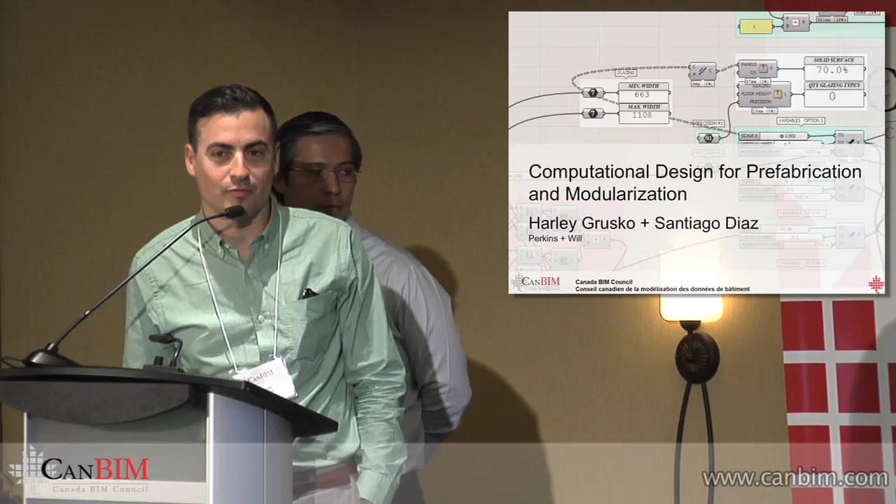But regardless, Santi and I are going to present, as you see here, computational design for prefabrication and modularization. One of the things that was mentioned just prior to us coming up here was that we were going to speak about Van Dusen, and I promise Van Dusen is a significant part of this presentation, but we also have another project called Orchard Commons that we're working on right now, which we'd love to show you as well.

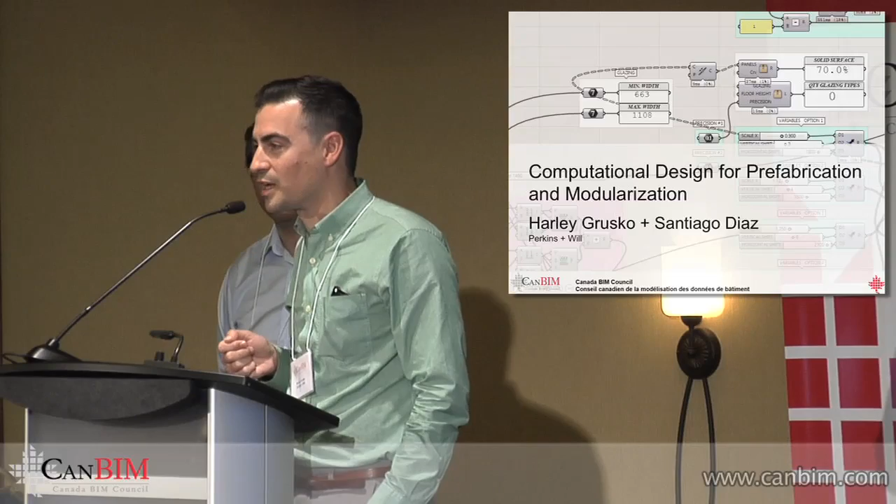So just a little bit about us. I'll introduce myself, and then Santi can take over and introduce himself. Santi and I have worked together for some time now at Perkins & Will, and we both had an opportunity to work on the Van Dusen project together. But just so you get some of the highlights here, I came originally from Winnipeg. I graduated at the University of Manitoba in 2007, and had an opportunity to come out to Vancouver to work with Perkins & Will, and I jumped at that chance, and it's been excellent thus far. I was the project architect on the Van Dusen Gardens project. Santi?

So I'm Santiago. I'm the senior computational designer at Perkins & Will Vancouver. I started in manufacturing just over 10 years ago. I worked at StructureCraft Builders, which is also a local firm, for about 6.5 years, and then I joined Perkins & Will almost 2 years ago.

So I can see that the font is not the same. Anyway, that's okay. This is a common problem.

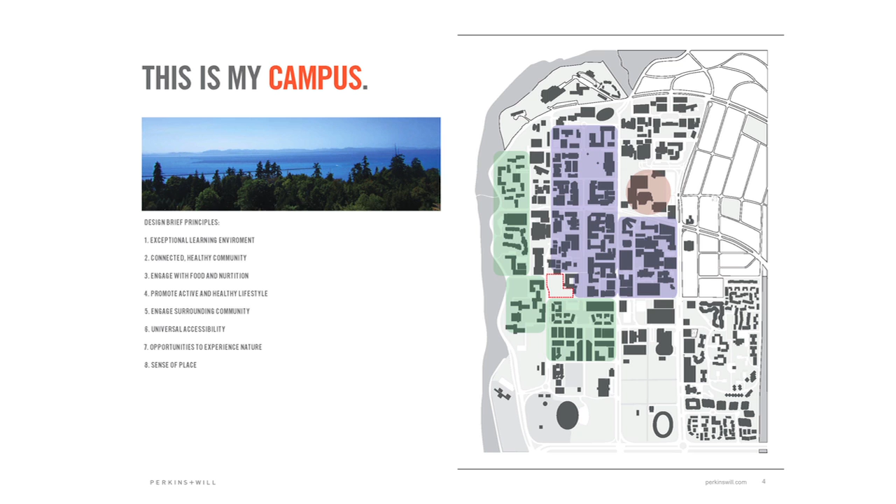They want to engage the surrounding community, so the building should feel at home within the context. Universal accessibility, of course, is a major factor. You're going to have people from all over the world coming to this hub, so you have to make it as accessible as possible. And opportunities to connect with nature. Nature is a very important part of what UBC stands for, and also create a sense of place. So as they're marketing this to the international crowd, they really wanted it to be something that was identifiable, even architecturally.

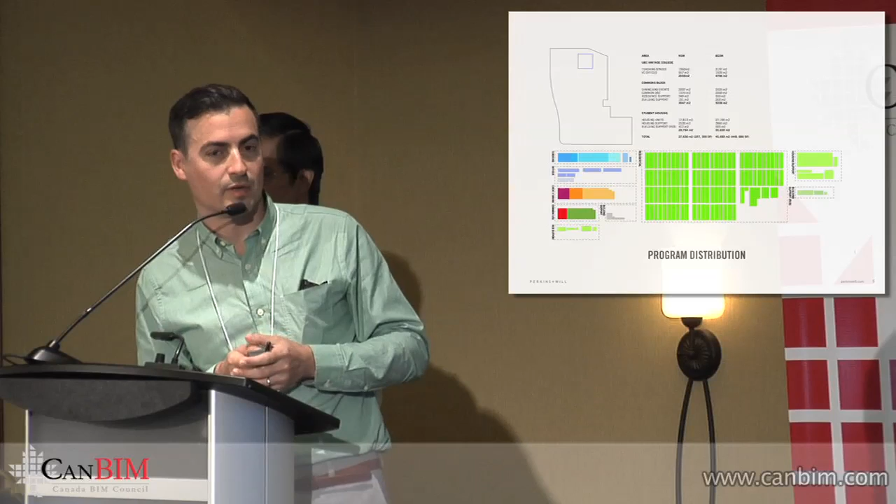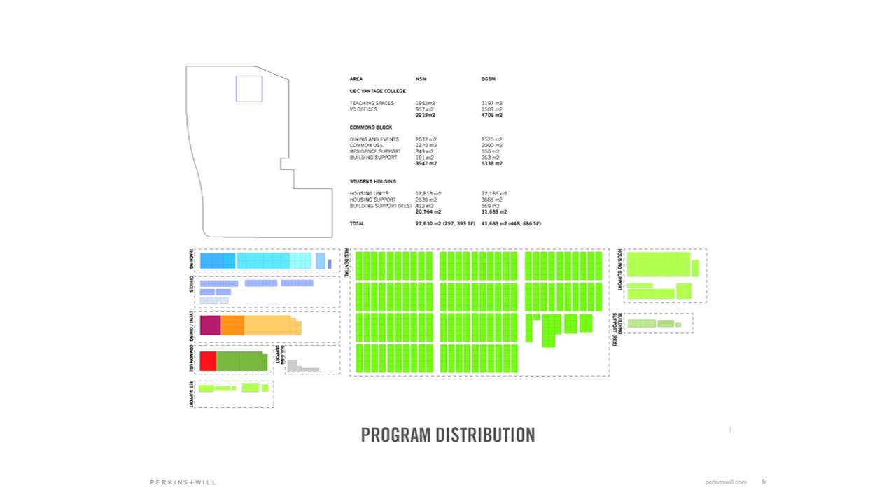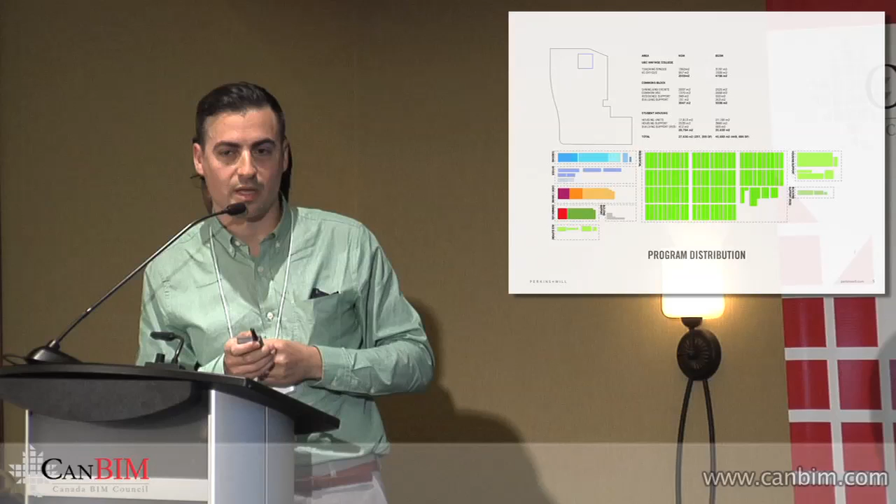Just the basic program. I'm not going to go into the nitty-gritty of this. You probably can't really see it very well. But essentially, there are 3 major components of the project. There's the Vantage College, which is actually the academic wing, the Commons block, which is where the dining and events are held, all the commons facilities for the student housing, and then the student housing itself, which really makes up the bulk of the program. That's all the little green bits there. Those are representative of actually all the rooms. There are about 1,050 student residences. And I think the whole thing is about 40,000 square meters in area.

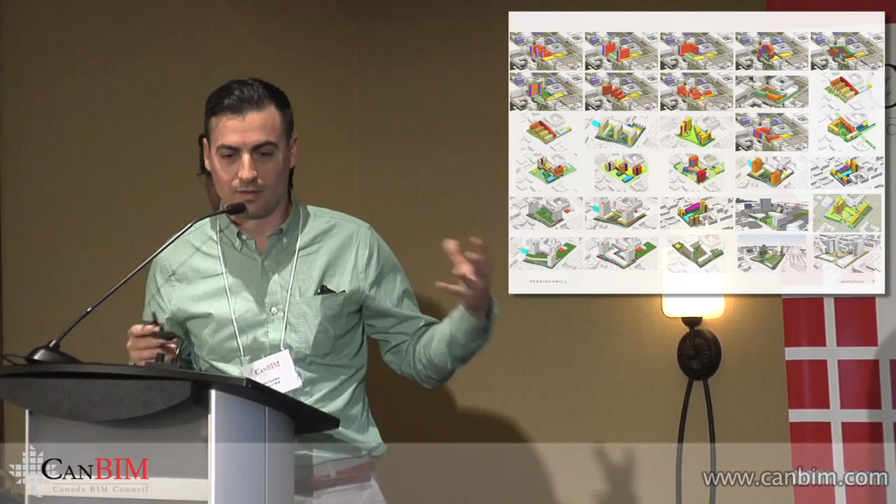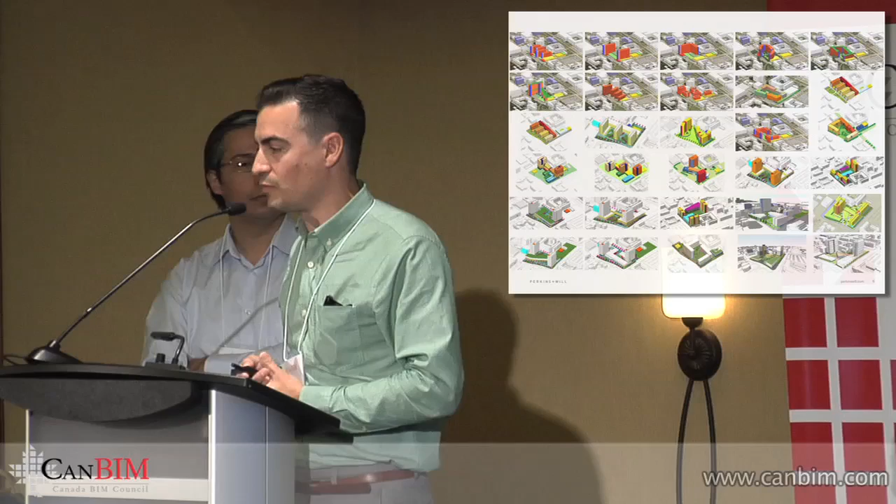So I love leading with things like this because the architectural concept was a series of explorations, let's put it that way. We spent a lot of time, and in fact, this is really probably 50 different types of program massings that we had come up with to look into the different ways in which people can occupy this site. So we looked at 3-tower schemes, we looked at 2-tower schemes, we looked at perimeter block, courtyard type designs, a whole bunch of different things, really to find a way to create a unique living environment for the residents at an urban scale.

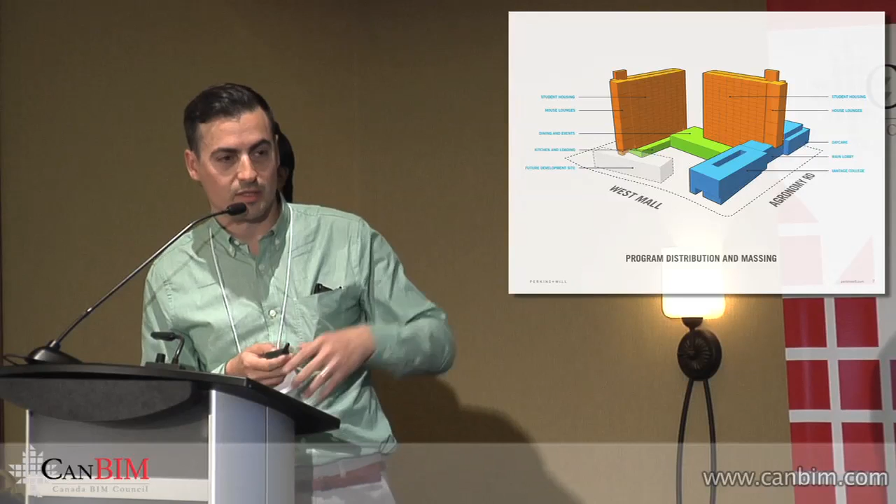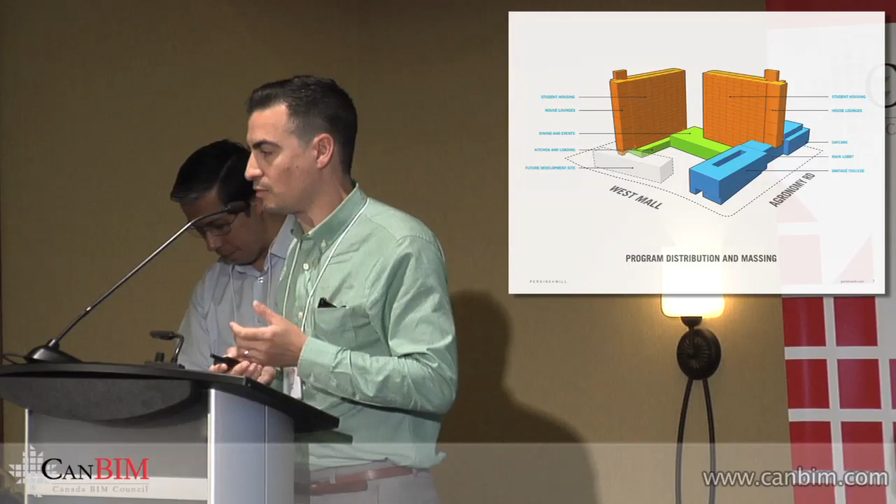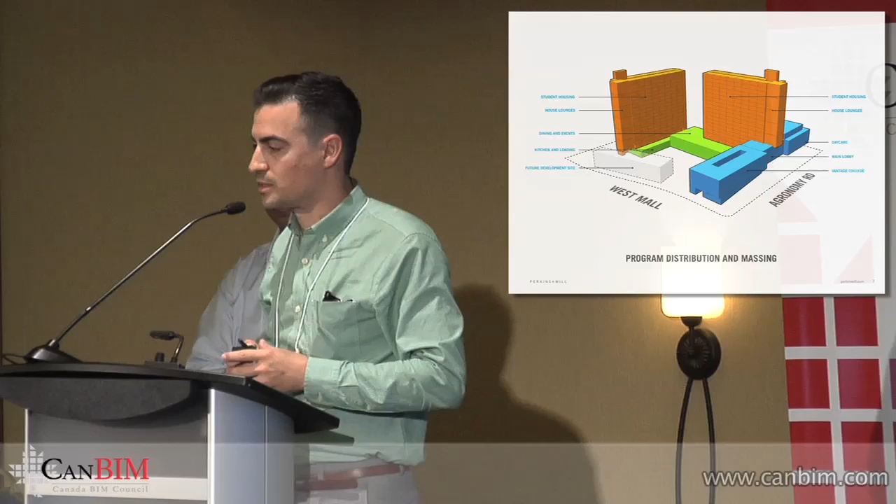But what we ended up with was basically a 2-tower scheme, and you can see the basic partie in this diagram here. So we have essentially 2 towers for the residences with these cascading student lounges that rise vertically on the edges of the building. We've got a long academic block that runs along Agronomy Road, and then all the shared programming for the student housing is that green mass that you see there connecting the 2 towers.

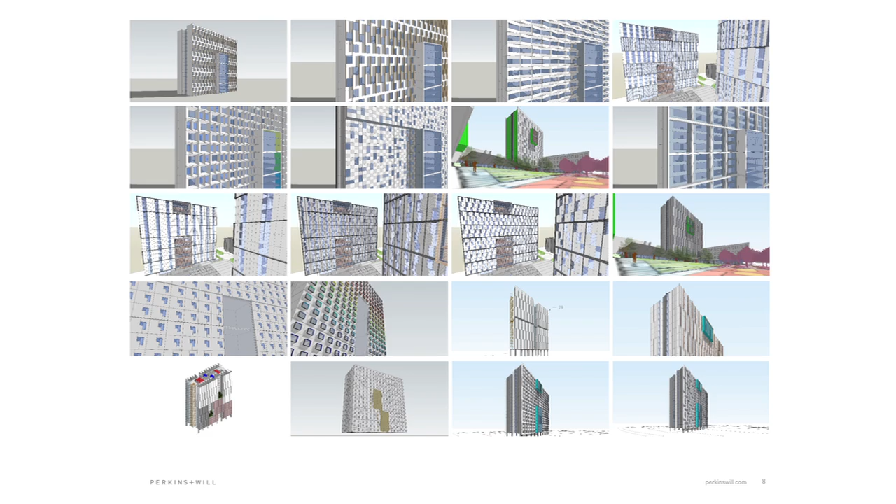So after doing all this formal exploration of the massing, we ended up with something quite conventional in some ways. So we struggled to find a way to create uniqueness given the massing that we ended up with. So we began to look at skin, and we started to explore different ways that we can create a new kind of aesthetic, if you will, based on the parameters that we could play with, which was really the skin of the towers.

And we were looking at precast concrete, actually, because the client, UBC Properties Trust, had experience in using it in a previous project and thought that we could apply it on this project and do it in a unique way. So we looked at a lot of different ways in which we could do it, a lot of random patterns, staggered patterns, all sorts of different arrangements, punched holes. We really thought, you know what, it's just not unique enough.

So we went back to the basics and thought a little bit more conceptually, and I'm going to get a bit architectural here, I can't help it. But we were really thinking about cultural identities. So you've got people coming from all over the world to Vancouver, and what is unique about those different cultures? Could we create a sort of diversity in the way in which we create the aesthetic of the building? And that has to do with the international nature of the building.

And what about nature? As I mentioned before, that's one of the original themes. What can we learn from forms that you find in nature? So we were looking at some of the ripples in water and things like that. And we also had this idea that the social spaces that connected the building would be done in wood. So this is a major part of the concept that we were working with in the project. And what can we learn from wood? So we started looking at some of the patterning that you might find in wood.

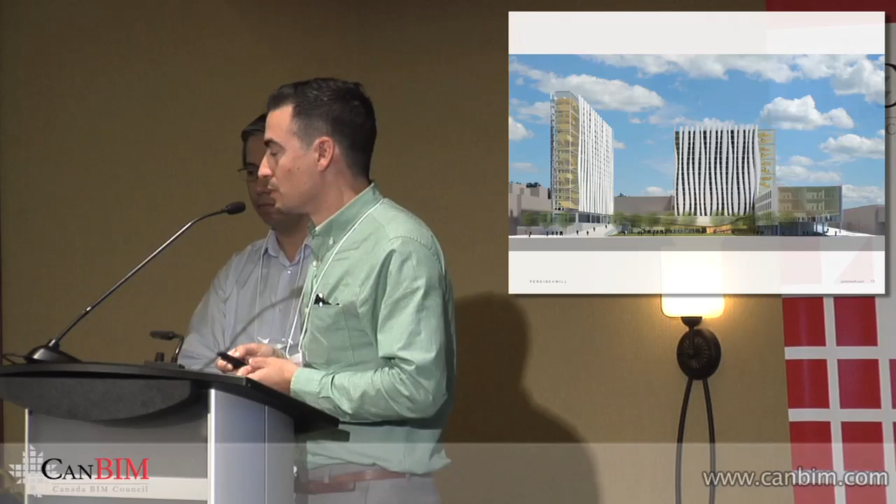So this is where we went, and this was sort of, I guess, the 21st century of a napkin sketch, maybe. I drew this almost a year ago or so, and like I said, when I drew it, there was no real kind of computation to this model, and you'll see basically the next steps as to how we start to add computational design to this basic overall form.

And really to do that, we had to identify what were the essential components that we're trying to get to here. So we had a high thermal performance as one of the main objectives. And really what this meant was a 60-40 split. So 60% of the building was to be solid and 40% of the building was to be glass. And this comes out of the thermal performance objectives.

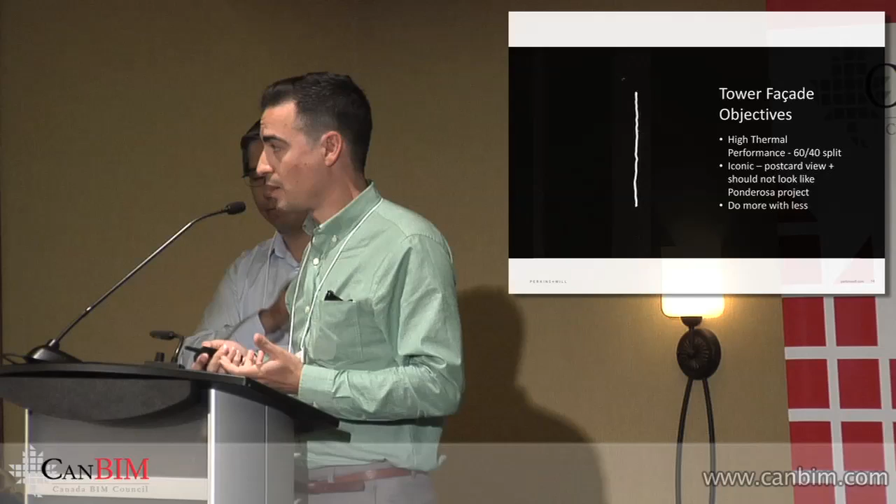And this is actually a bit rare in Vancouver, it's a lot more solid wall than you would typically have in towers around Vancouver. And again, an iconic postcard view, but not to look like the project that they had done before, which is the Ponderosa. Unfortunately, I don't have any photographs of that project. And then, of course, what all architects want to do, I think, is do more with less. Create the biggest impact with the least amount of moves that you can.

So we started with the basic straight line. And we wanted to exploit this fluidity of concrete. So we took that line and started to think about a single line with opposing forces. So different cultures are coming together and reacting against this line, creating this sort of curved spline. And we started to realize that you can create the shapes I was originally drawing by producing a calligraphic effect. It's really taking that singular line, creating it again and shifting them vertically. And we thought this is a way to create diversity without adding any more complexity.

And as I mentioned before, we were given this task of using precast insulated panels. So how do we start to think about modularization, prefabrication? How does that affect the way in which we create these ribbons? Well, we realized that the ribbons are two parallel lines that are shifted vertically. So what I'm getting at here is that there's a process of reduction in a way, because the original image that I drew in Rhino and had a little fun with, I think that's what I wanted to do, but it actually took a few steps through computational design to determine the essence of the design moves that we were creating.

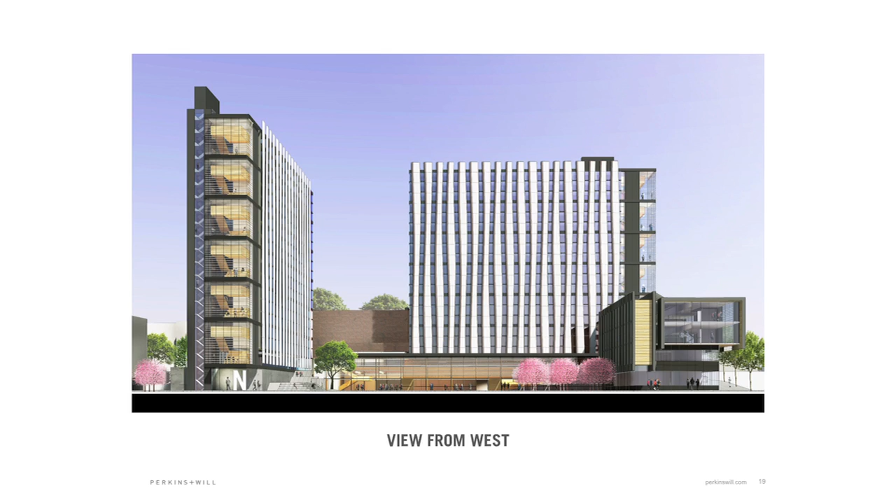So this is where we got to after that first exploration, and you'll see that it certainly looks a lot more subtle, I would say, than it did originally. But really, it's actually capturing, in my mind, the essence of what we were trying to create.

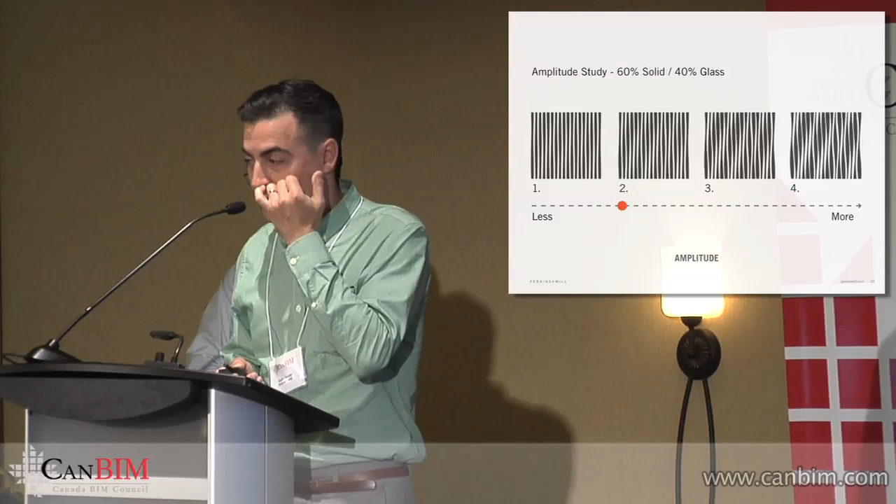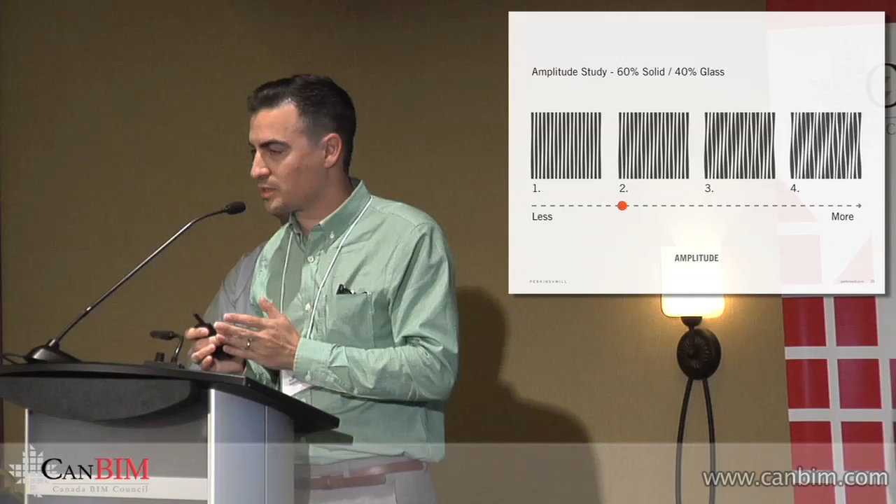And I think one of the other fascinating bits of the computational design work was that we were able to look at the subtleties of the facade. So here we see a range of less to more in terms of the amplitude of the curves that we were creating. Less, of course, on the left and more towards the right. And we were able to dialogue with the design team about where's the comfort zone? Where do we actually feel that we're creating the right effect? And we found a sweet spot somewhere around number 2.

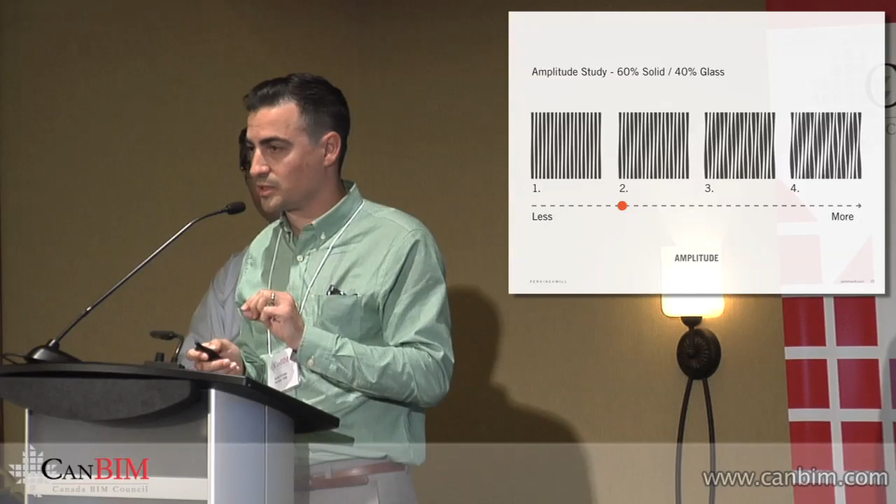All the while, all these examples are still showing that 60% solid, 40% glass. So that's a given. That doesn't change. So we're able to manipulate the design of the facade while maintaining this constraint.

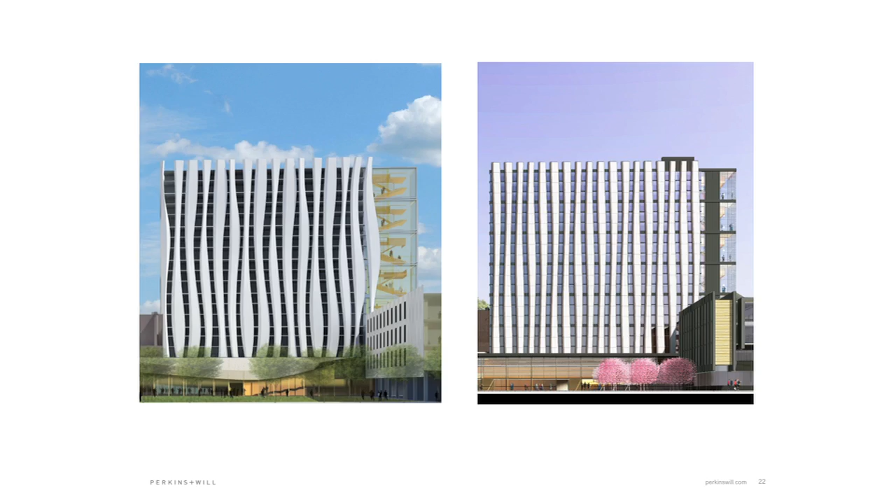So here I'm showing the first napkin sketch to where we are. Well, we were there probably about 5 months ago. We've moved on a little bit since then. But, Santi.

So there are 4 key points that I'd like to leave with you by the time we finish this portion of the UBC Orchard. The first one is that computational design is a medium to distill design intent, and I'll elaborate on that with the subsequent slides. The second point is that prefab in itself has some benefits. It brings some assurance or certainty in the construction process. Computational tools can amplify that effect by transcending it through design into construction. And there are a couple more points which I'll get to as we go through the slides.

So what I'll do here is elaborate on the point of how computational tools can distill design intent. And in order to do that, I'll walk through part of the computational process almost on a step-by-step basis. But before that, I'll introduce the concept for those who may not be familiar yet with computational design. I like to describe it as a hybrid discipline, and it combines computer programming with design in one form or another. And it has emerged out of necessity because of very large and complex projects throughout the world. And there was no other way to realize them if it weren't for devising new tools, new digital tools.

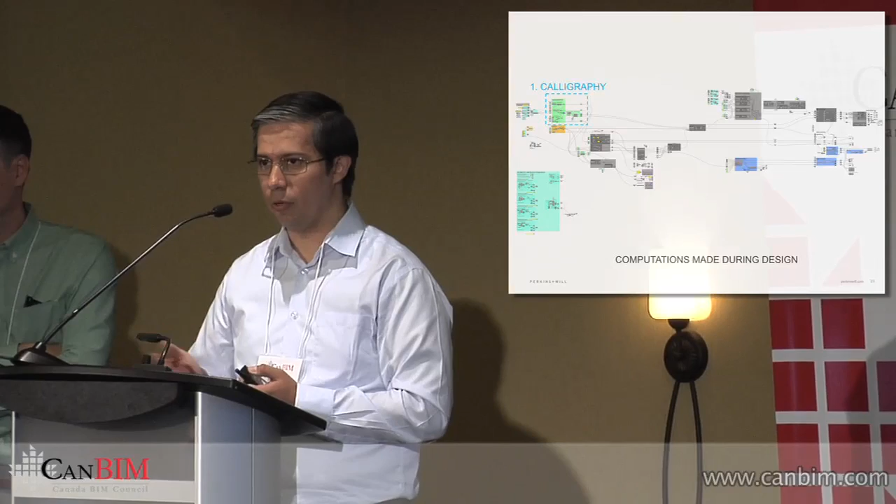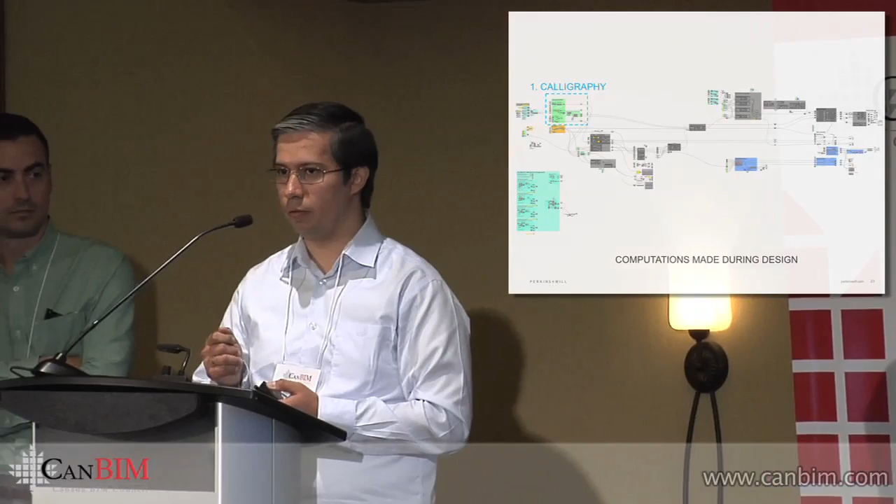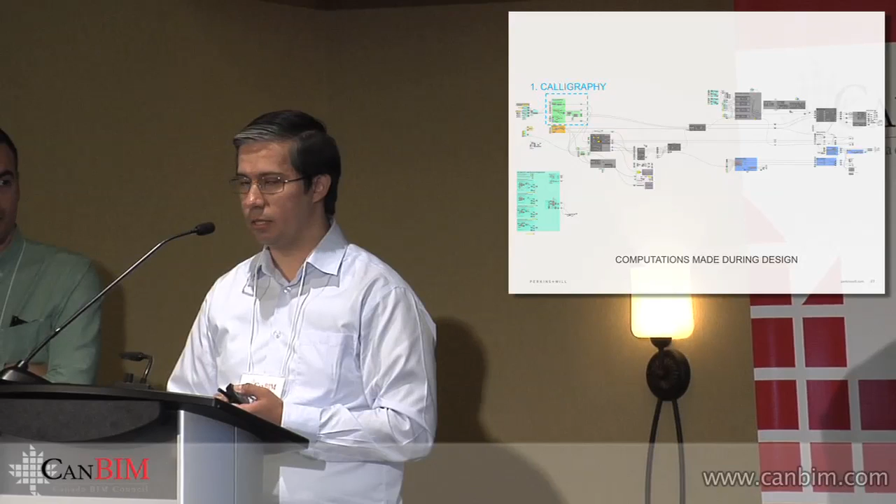And so, sporadically throughout the world, there have been people who have moved away from their comfort zone, moved away from design, and have adopted some programming skills. And since then, there have been some new environments that allow designers to more comfortably program. So they're not in a fully immersive programming environment. They're in a hybrid environment that's partly design, part programming. So one of the most popular environments is called Grasshopper. It's a plugin for a software called Rhino 3D.

And what we're seeing here is a snapshot of the visual algorithm for the UBC Orchard. And it is a depiction of the logic of how the panels were realized. And there's about 10 steps that I'll go through. The first one is, how did we realize the calligraphy? The calligraphy, just to remind you, was a very important interpretation of some of the values that we wanted to embed in the design. So there's ideas of diversity without conflict, and we wanted to put that as the first priority in the whole algorithm. We wanted it to be the first thing that would occur throughout this logical succession.

And you can see there on the screen that there are a couple screen captures. The one above is what's being generated in the model in 3D. And the one immediately below it is the sketch that Harley made. And this is where we begin to distill, where we begin to extract the essence of the design. We're taking the idea and we're generating it explicitly by the principles that generated that sketch. So it's not just a spline. There's some thought process involved to generate that geometry. And that's what's being realized in that cluster of components. Each one of those boxes performs a logical operation. And when you combine them together through a certain flow, they'll result in geometry or other types of information.

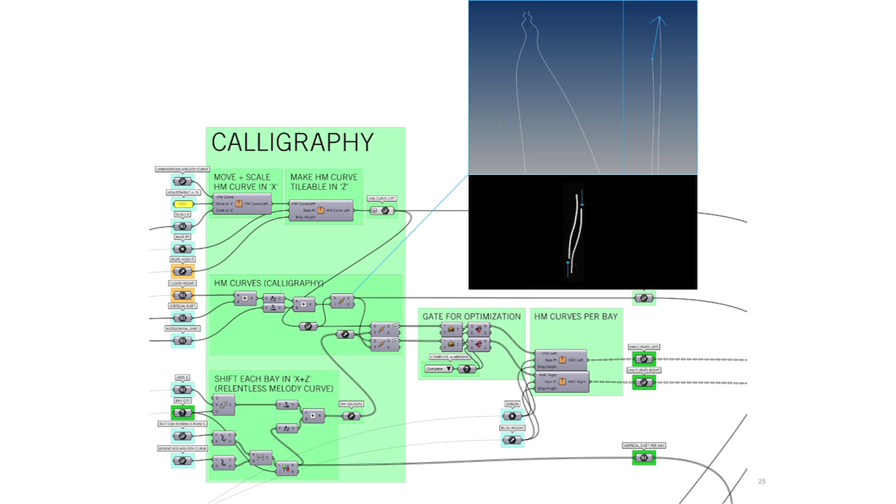As we traverse through the logical algorithm, we'll find that the next thought, which is to offset and create a sense of calligraphy, is also depicted in a geometric fashion. And so the actual step-by-step process of how the concept was devised in an abstract way is now being realized geometrically in a very methodic way, being as true as possible to the original thought process. And here what we're doing is we're taking each of these calligraphic ribbons and we're displacing them on one of the axes, on the z-axis, to create diversity from bay to bay throughout the facade of each of the towers.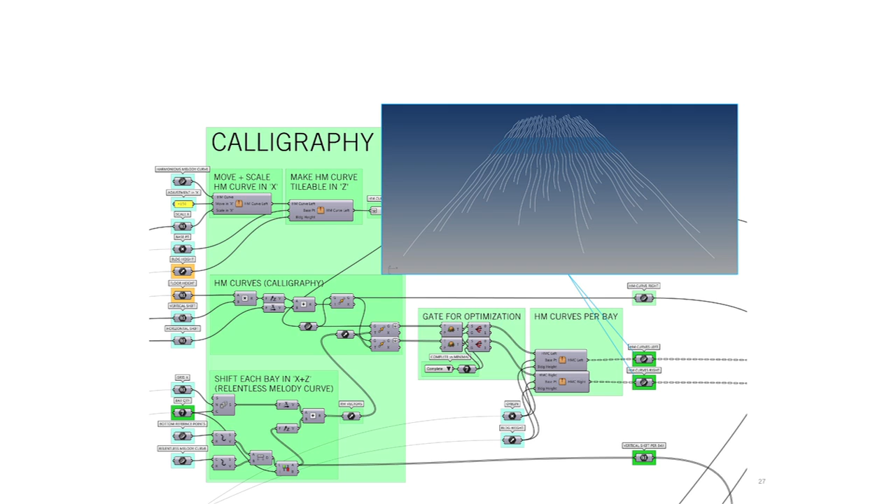Then the next step is to truncate that, taking a snapshot of this geometry, and now we've truncated it within the scope of the actual facade, so for the 18 floors. And that's a perspective view, so you don't get a true dimension of the height of the geometry. It's just so that you could see the whole pattern in one shot.

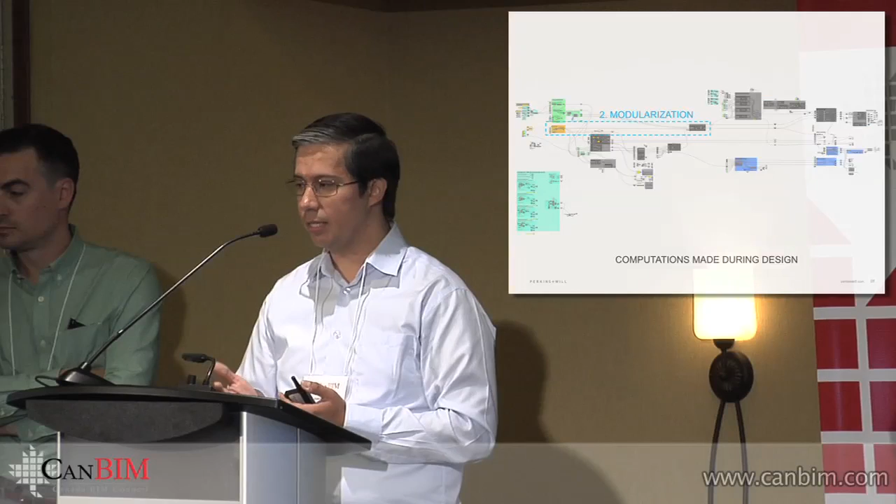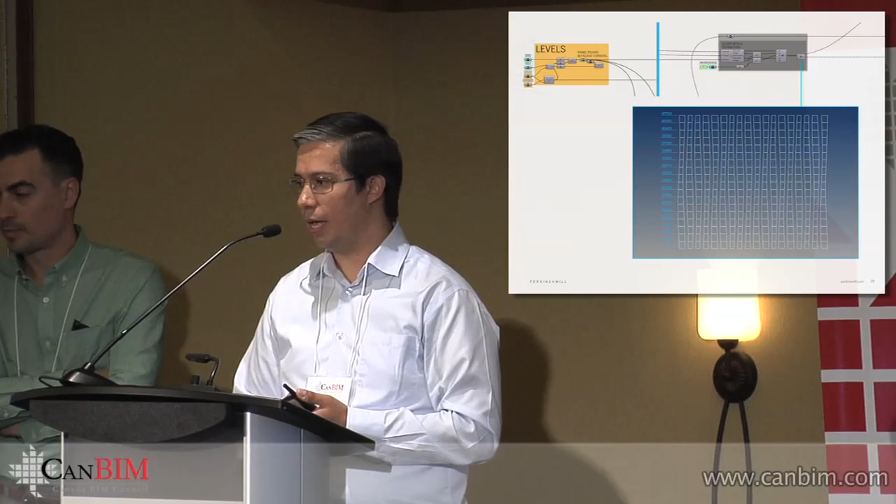The next step is, well, now that we have a general geometry that we're generating, and we feel that there's a high fidelity of the design intent realized geometrically, now let's get closer and closer to the realization in the real world. So we know that we're going to work with prefab. How can we embed prefab principles inside the algorithm? And so that becomes the second priority. It's subservient to the architectural concepts. It's not the other way around. If we had started with the modularization, we may have been constrained with the architectural concept. So we wanted to explicitly define the architecture first, the modularization second. And here we bring in some project data such as the levels and split those curves into panelized shapes.

The next step is to create a description of the different panel types. So for lack of a better term, panel typology. And there what we're doing is bringing in some information that will inform the designers on the distribution of the panels by using a set of colors and numbers to label the panels. This is common practice in computational work.

Next is to get into further detail. These are insulated precast concrete panels, so there's an inner withe to the interior of the building, an outer withe, and then there's a layer of insulation in between. The inner withe is a rectangular shape, and it fits in between slabs. The outer withe is outside of the slab, so it has more of a free-form shape, and it could

extend a bit beyond. And so the inner withe is generated, as you don't see it very clearly here, but there's a dashed line, a white dashed line, offset slightly within the profile of each of the panels. And this is the part of the algorithm where that gets realized. And we're going to pick up the pace a little bit here.

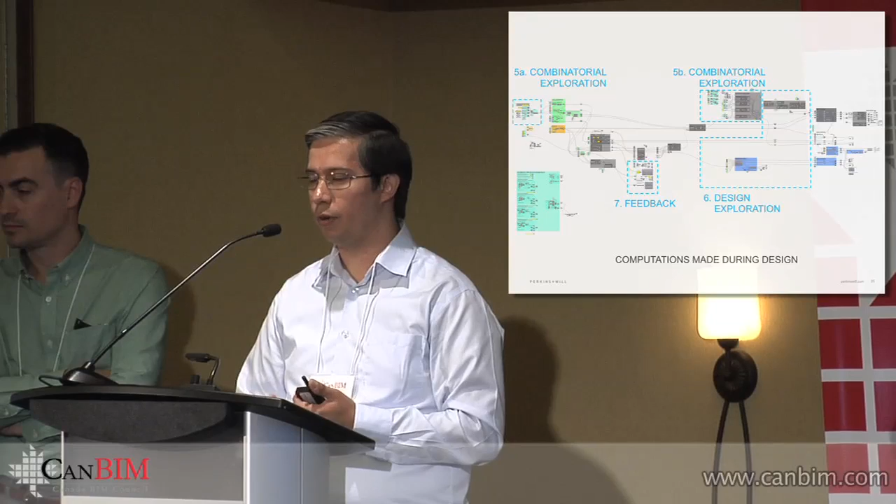And at this point, we have the different elements that we could use to realize the facade. We have the overall geometry, design intent, and we have the panelization. How can we explore different combinations? There are, I can't remember the number, there's 40 quintillion or so different unique combinations just in the position or the layout of the panels.

So usually in optimization, the first step is to do a quick mathematical calculation. What is the total possible combinations? And that will inform you on what's the most appropriate computational strategy to explore through those different possibilities. And that informed us that we should use a category in optimization called stochastic optimization.

So what that is, is that it reiterates, it makes a selection of random samples. It tests it towards a minima or maxima, and then based on that result, it'll change and have a new selection and repeat the process until it's gravitated towards the goal that it's been seeking. And that is the most appropriate solution for this variety of combinations. So we have various points where we could get different results with the panels.

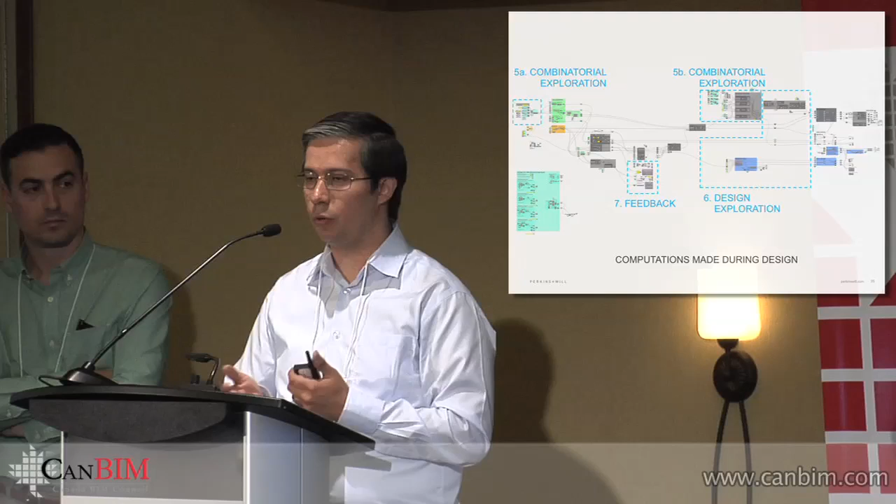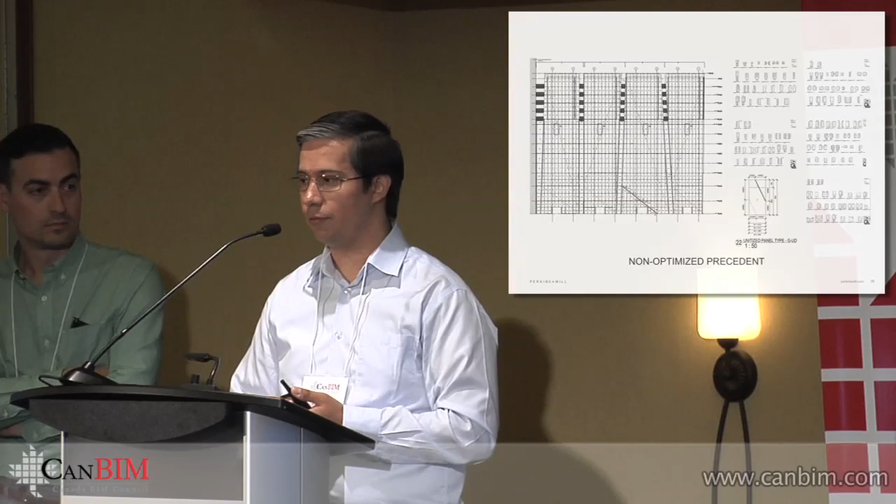What we have is a series of 18 panels that get repeated throughout the facade. The pattern is continuous and it gets offset vertically, so it is inherently, by design, optimized to be 18 panels. The next variant is what happens with the glazing in between, because if you shift the panels differently, you'll get different widths or designs for the windows. So how can we minimize that?

This is where we begin to optimize computationally the pattern of the concrete panels, and we see whether we can reduce as much as possible the glazing units without losing the design intent, which is what's driving the whole algorithm from the beginning. So this is one combination, and we went through many of these different combinations. And one of the key points here is that we have the flexibility of exploring combinations without being preoccupied about what this will do with our overall process. And this is very important.

This is probably one of the most important points that we could make in this presentation, is that as designers, we crave flexibility, freedom, to be able to make decisions, change our mind, ask questions, be inquisitive, interrogate different possibilities in design without having to be preoccupied with process. We want process to be instant. We want process to be so easy that you don't even have to think about the process. It just happens. And that way, it's as close to 100% creative as possible.

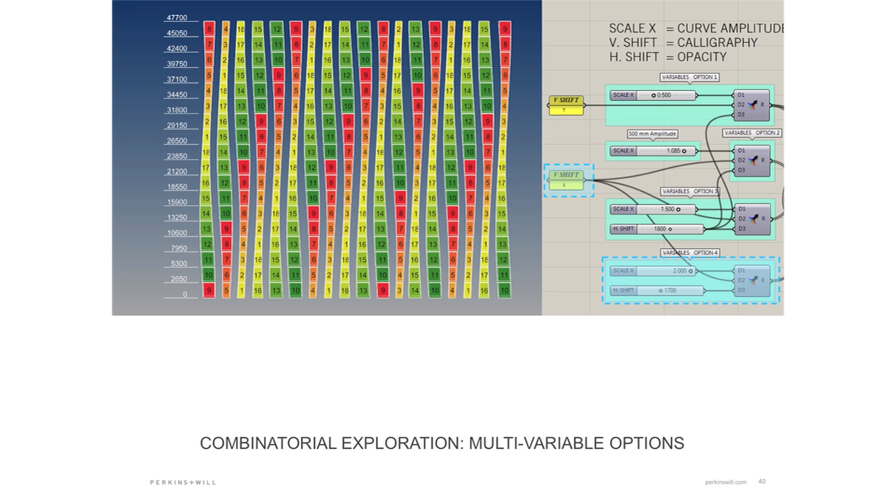And so as a computational designer and as an architect, we put a significant amount of effort into getting closer to that 100% situation. So going back to the screen, this is one combination, and you'll see there's the results geometrically. The geometry changes if you change some of the parameters that are generating the layout of the panels and the shape of them. And as we go through the different options, you get different results.

If we change a combination of the geometry in another aspect, for instance, the detailing, and I'll show you in the next slide, we explored things like reveal lines or ridge lines. We want to test it back to some of these combinations without the expense of the exploration process. So we want to be able to say, well, we really like this idea of ridge lines, but not with the geometry we're looking at now. How about we go back to a geometry that we did a few weeks ago? We can easily do that with this because it's a relational algorithm.

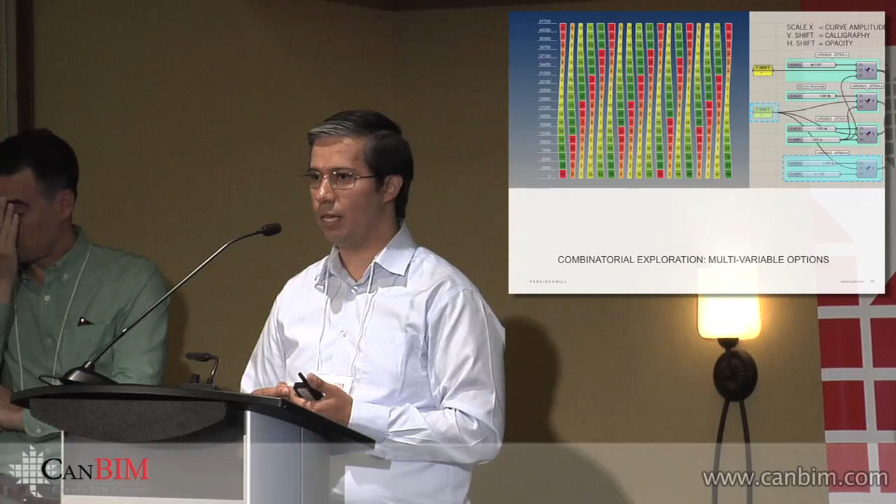It basically executes every time you change something. So you have variables and you can save them, and you can just switch to another set of variables that you had saved and it'll just re-execute. And this is why this is commonly described as generative design.

So this is a different pattern. This is obviously not what we ended up with, but you can see there that it could go the wrong way. You end up with these very slender glazing units in between the panels, and then the opposite happens in other locations.

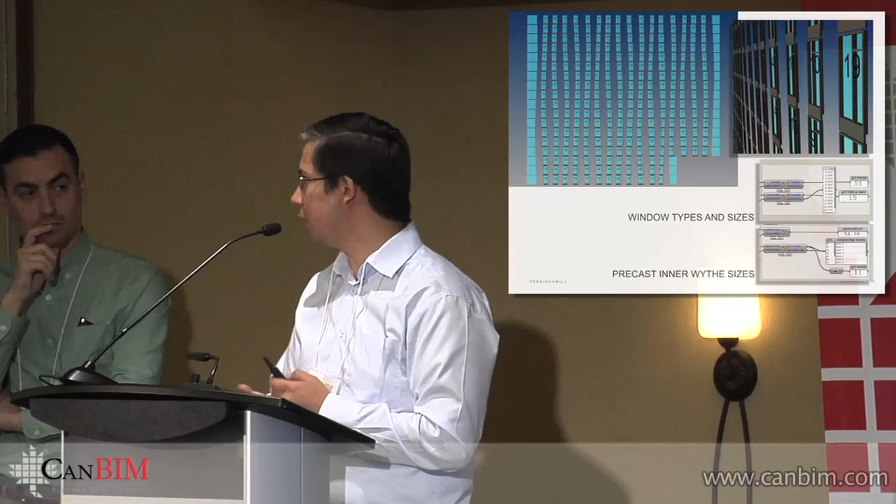So then we look at further detail into the glazing, begin to replicate the glazing system in 3D, and you don't see it here, but we would bring in the concrete slab and see how that interfaced. So I should go back to the previous. And we also paid attention to reducing the variation with the precast inner wythe sizes. So we actually grouped that into, I think, only 3 or 4 different types of inner wythe, while there were 18 types of outer wythes, and about 6 or 8 different window types, I think, except for the corner units.

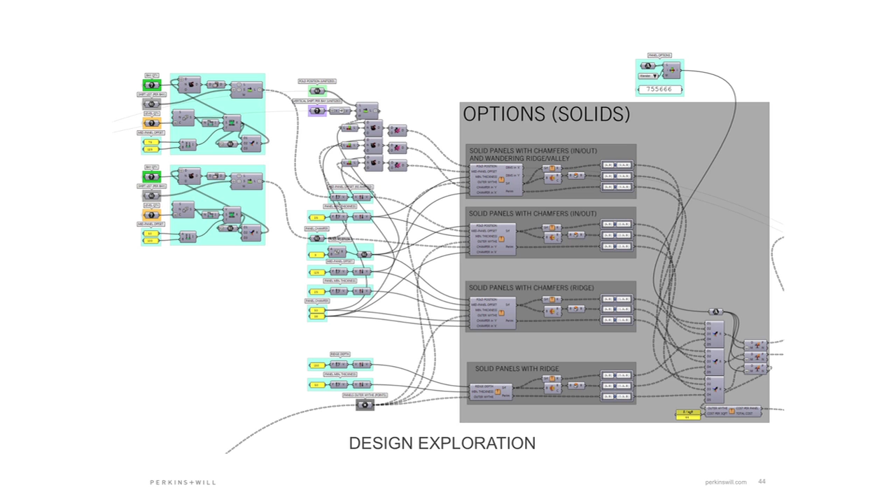This is the example of expressing a bit more of the geometry with these stripes, which we looked at for some time. And then these are different options for what if we want the middle portion of the panels to be wider at certain points and narrower at other points. And so we described it as an innie and an outie. So it would be concave sometimes and convex sometimes. What if we want it to be always convex? What if we want it to be always concave?

We can change these options and explore it with any of the other combinations of geometries that we needed to. So we have freedom to test one with another. If we made a decision to go back to the beginning of the algorithm and change something that was perhaps a new interpretation of our design intent, that would not destroy the work that happened afterwards. It's fluid and it's robust.

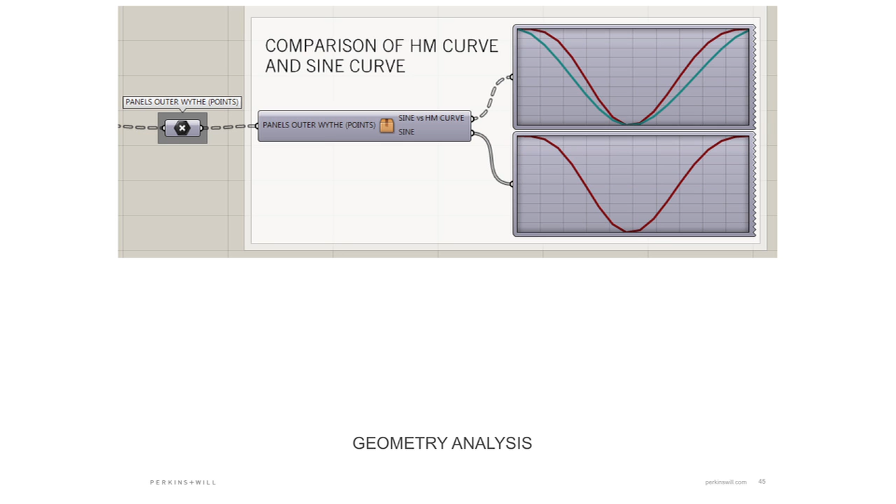We can also interrogate what are the nuances of the geometry that we're looking at. The closest geometry or simple geometry that we can compare the sinuosity of our calligraphic curves was a sine curve. But we noticed as we tested different geometries to create that calligraphic expression that if we had just gone with a sine curve, it wouldn't have done it for us. It didn't have that something that created the expression that we needed. It lacked in some pronunciation of the curvature, and you can see the comparison between the two there.

So we need to bring this into a BIM context because of many reasons that you are all familiar with. And on the left-hand side, you'll see in the algorithm that the Revit model was brought into the algorithm to reference. Up until now, what you've seen is a facade that didn't need the model or the project at all to be generated. But once we bring in the BIM project, we can take that and associate it with the building, and it'll just snap on to the different elevations of the towers.

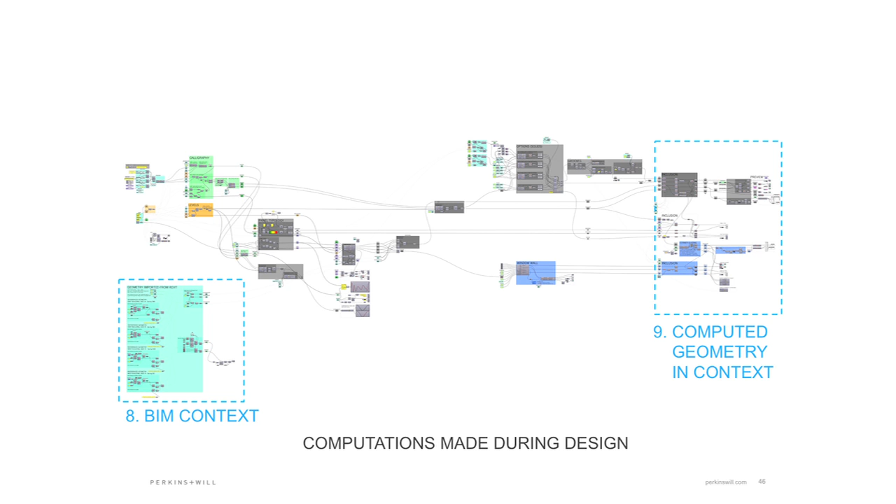And so the left group is bringing in the information we needed from Revit. The right-hand side is to associate the algorithm onto the Revit model. And you can't see it here because it's too small, but the lower portion of that right-hand area has one component to send out information to Revit, and there's another component to send it to Autodesk Inventor.

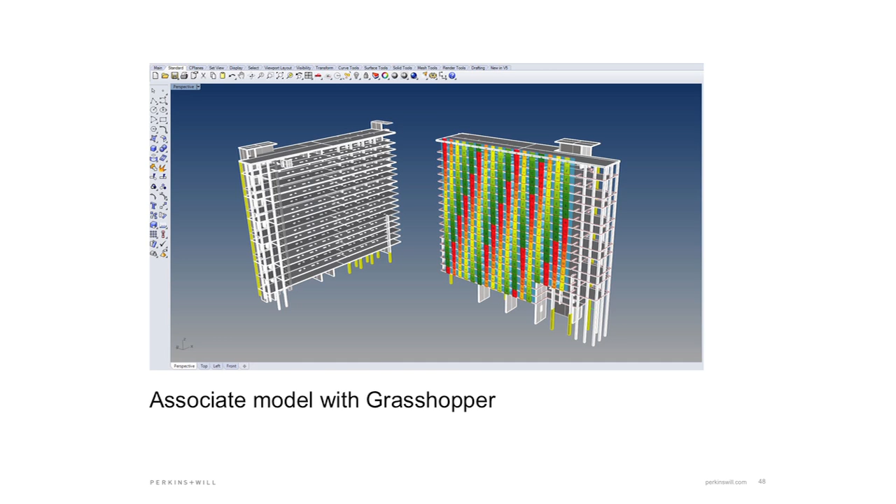So in a few steps, there's the Revit model imported as dumb solids. The geometry gets associated, and then Community is a tool that I've been developing to interface with Revit. And there's one main distinction between this tool and other similar implementations of tools that have been done throughout the world.

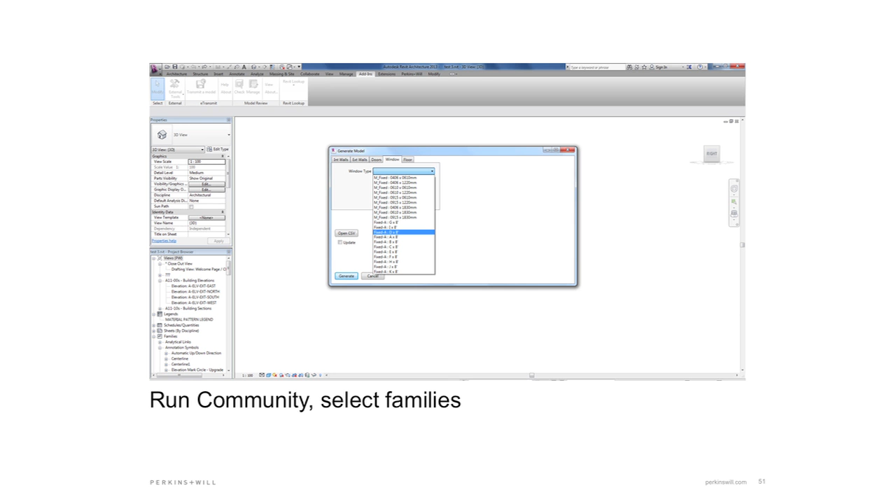Mine has a series of geometric solvers, which allows the data that you output from the source program to be incredibly simple, and through geometry, elements get associated to one another within Revit. So you don't have to actually say this door belongs to this wall. You just generate the most basic geometry, and then Community will know whether a door belongs to a wall and embed that family.

So then this takes about 20 seconds to generate this Revit model, and I've also thrown in some of the floor plates for reference to make sure everything was aligned. So we come to a different paradigm: usually we work in BIM from start to finish with the same file, and we modify continuously.

And it's not like with AutoCAD. You used to be able to, with AutoCAD, create a file, but then if you wanted to do something a little bit different, you might do a copy, and you would create version A, version B, B prime, whatnot, and you'd begin to pollute your hard drive with all these different little AutoCAD files that were becoming very difficult to manage. But at least it gave you the flexibility of just being able to create these throwaway files to explore and test ideas.

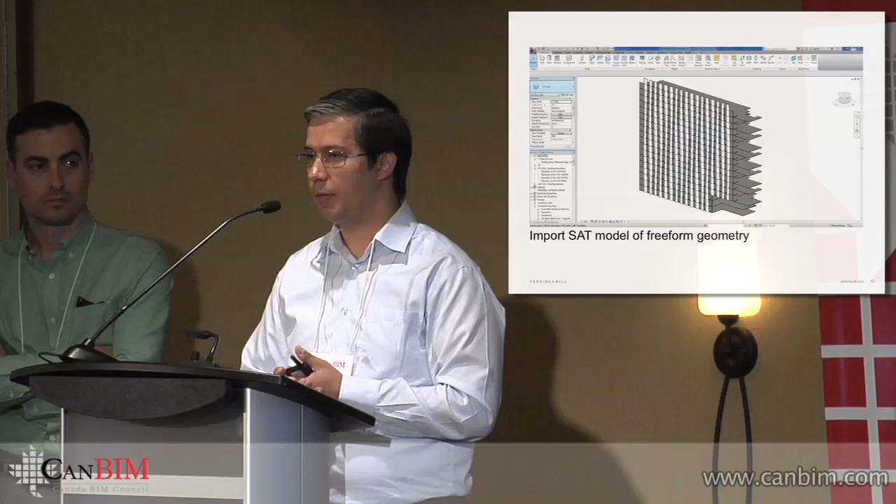Whereas with Revit, you don't see that necessarily happening because it doesn't intuitively go with the way in which the software was designed. There might be some that would argue against me. I don't know enough about that to be able to debate that. But here what we're looking at is when you can generate a BIM model instantaneously, then you can actually go back to more of a simplistic process the way CAD was.

You can just generate a BIM model and it becomes a throwaway model, and then you can make a change and generate another BIM model, and you can keep them for keepsake, for comparing or for quick meetings and so forth. Then those are natural BIM elements, walls and windows that are generated from families that are already loaded on the projects.

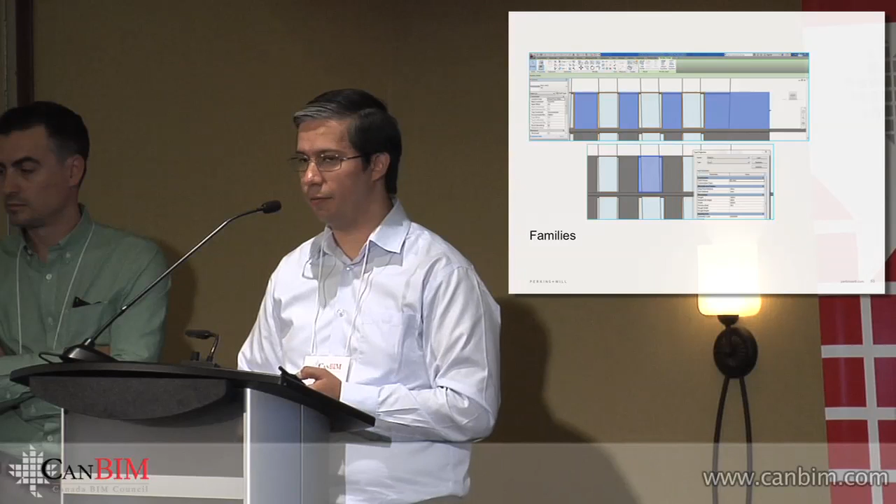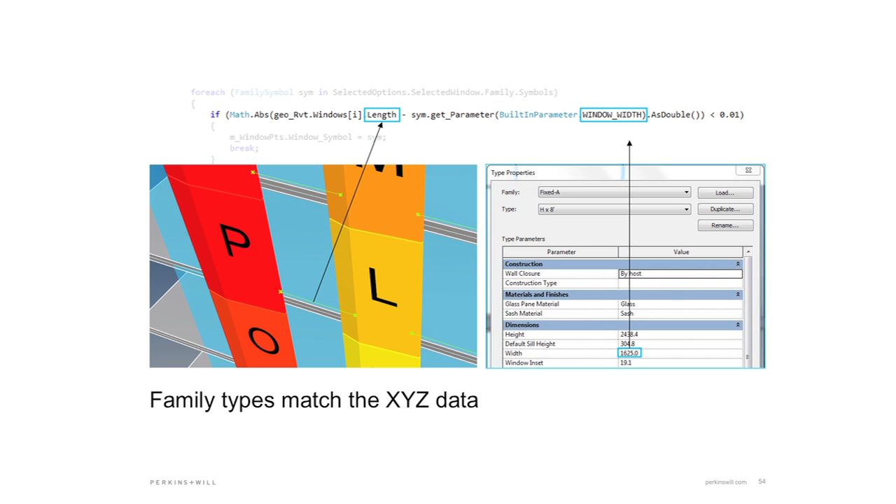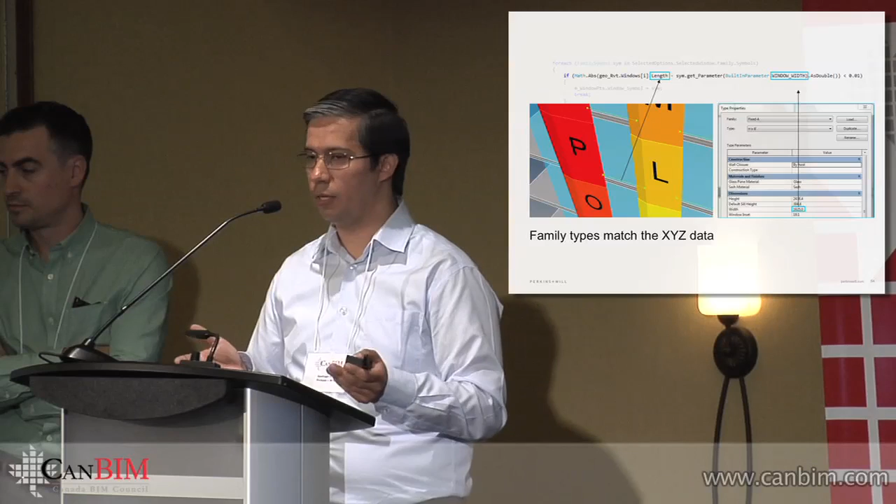That's one of the thousands of lines of code showing the association between information from the computational file, in this case the width of a window, which is expressed as the length of a line that generates that window in the algorithm, directly to the width of the window in Revit. So there's a direct correlation.

So moving it into Inventor, it's done in a bit of a different way, but it's similar principles. You're taking a very small subset of information, but you're generating a richness of information with the native capabilities of this other tool, which is Inventor. And so with Inventor, we could create a drawing that closely resembles a shop drawing, but it sheds clarity to the process. It helps whoever would actually do the work, to build this panel, to know exactly what's going on.

We didn't get any questions when we set out to get some mock-ups prepared for us. We had no questions. They said we made their work fairly easy for them to get to this level. And it's showing all the information for those different 18 panels in the one drawing.

The key here is that if we decided to go back and change the design intent or change the combinations, or change the geometry of the variables, we hit a few buttons and now we have a whole new drawing. It takes a little bit longer than what I'm making it appear to be, but it is incredibly faster than what it used to be before employing these kinds of tools.

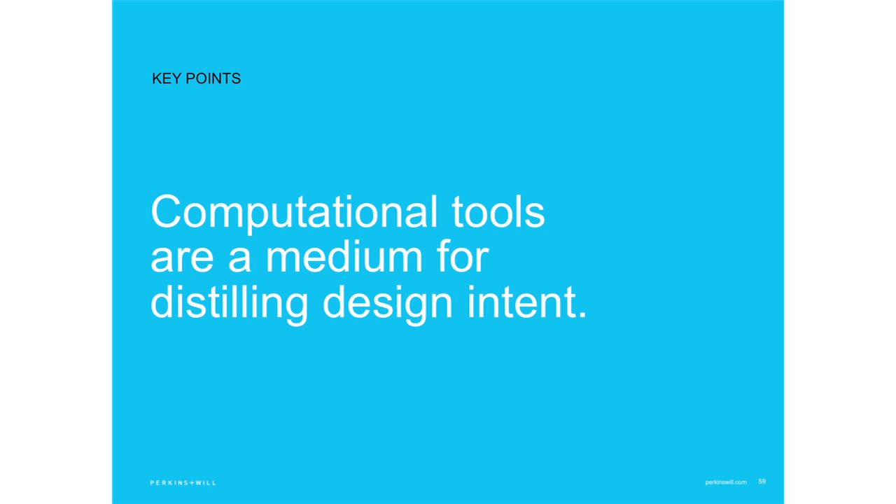So the key points here are the computational tools are a medium for distilling design intents. They actually allow you to extract the essence of a design direction. Computational tools reduce the uncertainty of rework by allowing designers to simultaneously explore or lock variables, thus providing more time for design.

We can optimize prefab without compromising design intent. Prefab helps reduce uncertainty in design in and of itself. But in addition to that, computational tools allow this assurance to transcend design into construction.

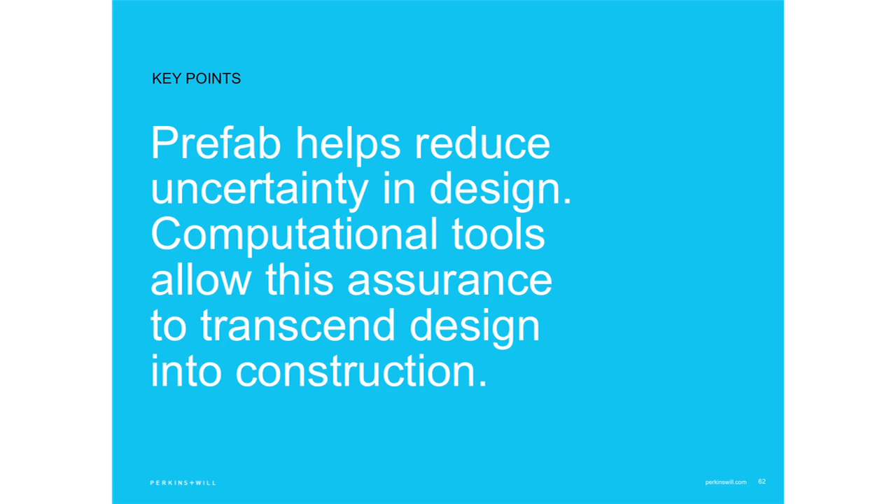Thanks, Santi. Okay, so we left ourselves with 11 minutes and 22 seconds to speak to VanDusen, so bear with me. VanDusen Botanical Garden Visitor Centre was started at the end of 2007. I think we were complete in 2011. Just some basic statistics here. The building was constructed by Ledcor. Construction budget was somewhere around $14.4 million. It's a 1,800 square meter visitor center.

And when we first started this project, we thought a lot about its context, and the building is set in such a beautiful place. We were looking for inspiration that would drive the design of the project. And I'll tell you a really interesting story, for me anyway.

When we first started thinking about the design, I was at home one night prior to a design meeting with Peter Busby and Cornelia Oberlander, and I was looking through my library of books at home, and I found this one book by Karl Blossfeldt, who took these amazing photographs of plants, and the book is called The Alphabet of Plants, if you're interested. And I looked through this book and I found this great photograph, and I said, you know what, this is it. I've got to bring this image to this design meeting the next day and show it to everybody.

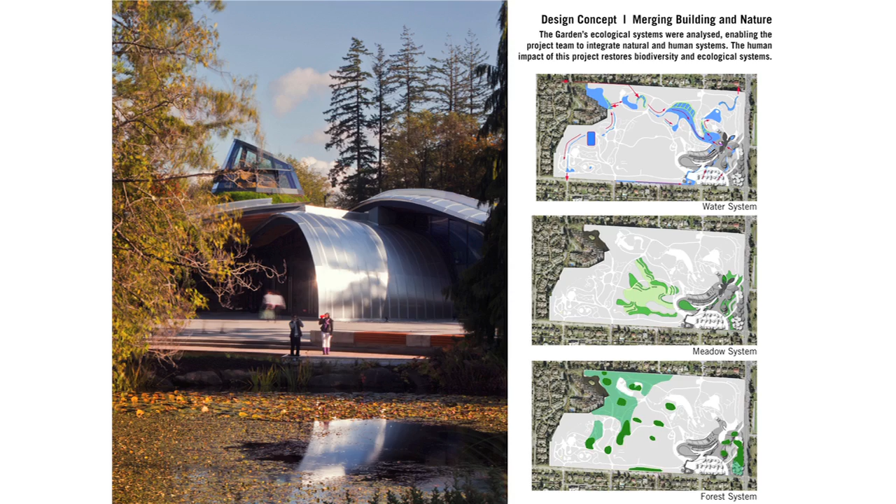They wanted to create a building that would inspire a sense of wow and draw people to the facility. So we wanted the building to be quite aggressive, quite loud in its language, but we also wanted to integrate it into the landscape. So we did a lot of studying before we actually created the design for the building. We looked at the meadow system, the water system, and the forest system to learn how to create a building that could, in fact, be one with its surroundings.

And here you can see a site plan of the building in relationship to its neighbors, and you can tell just by the roof plan of this building. I don't know how many of you have been there before. How many have been to the VanDusen Gardens? Oh, quite a few. Okay.

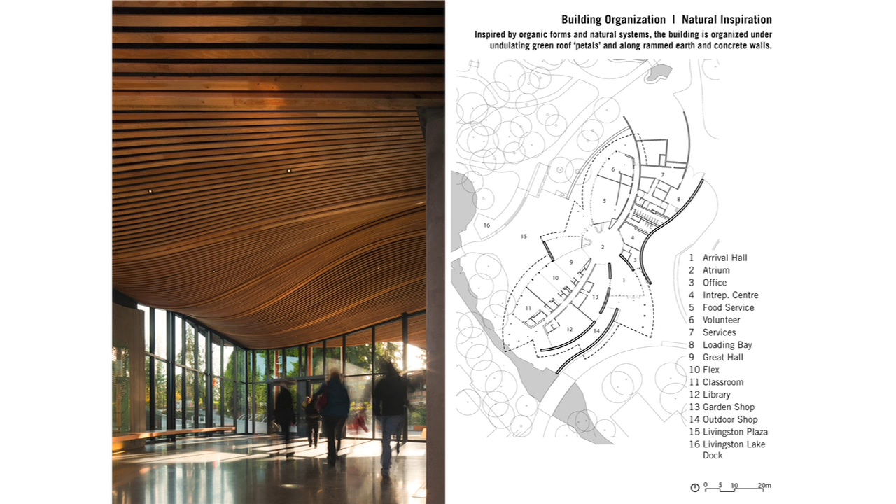And this is the plan of the building as well. You can see on the east side, on the Oak Street side, there are some large rammed earth walls that protect the inner sanctity, let's say, or keep the noise away from the interior of the building. Whereas on the west side of the building, it's actually quite exposed, quite open to the landscape. In fact, from a geometrical perspective, it's quite interesting too.

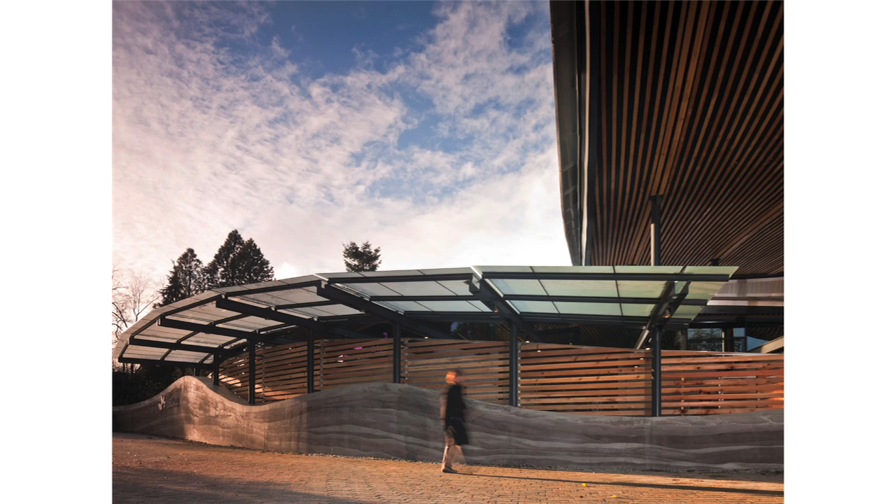The center of the building is where the oculus is located. I'll show you in the subsequent slide. But the geometry of the walls and the roof all radiate from the center point. The idea being that when you're exploring the gardens, the walls and the roofs are actually pulling you into the center of the building. On the left side, you see an image of the entry, and really this is the roof that we were trying to create: a continuous, free-flowing shape.

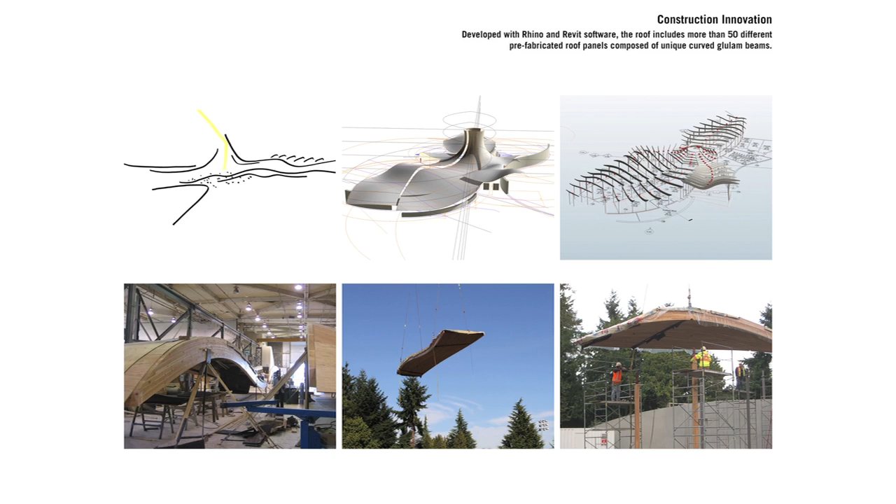And along the way, there was a lot of construction innovation for us at Perkins & Will. Here you see a sequence of imagery, one being the original Rhino file. This is a free-flowing drawing, which was then cut into sections in Rhino to generate the various beams. There were, I think, over 100 unique glulam beams, 50 or so unique glulam fabricated panels, which were actually produced at StructureCraft shop.

The glulam beams, I think, were from Structurelam, and again produced in StructureCraft into panels, which Santi helped out on quite a bit. And then once those panels were fabricated, oh, and by the way, the panels themselves are quite fascinating because they were completely built in the shop.

So the membrane was placed on them, the sprinkler piping, the electrical, the final ceiling finish, that was all included and built in the StructureCraft shop before it was moved to site. And some of these panels were about 10 feet wide by 60 feet long, or so, even some of them larger. And they were shipped by truck to site.

The columns were already in place, and we watched one of the largest cranes I'd ever seen for a single-story building lift these ginormous panels and drop them on top of columns. I remember they were really fearful that the architects were going to be there and watching over everything.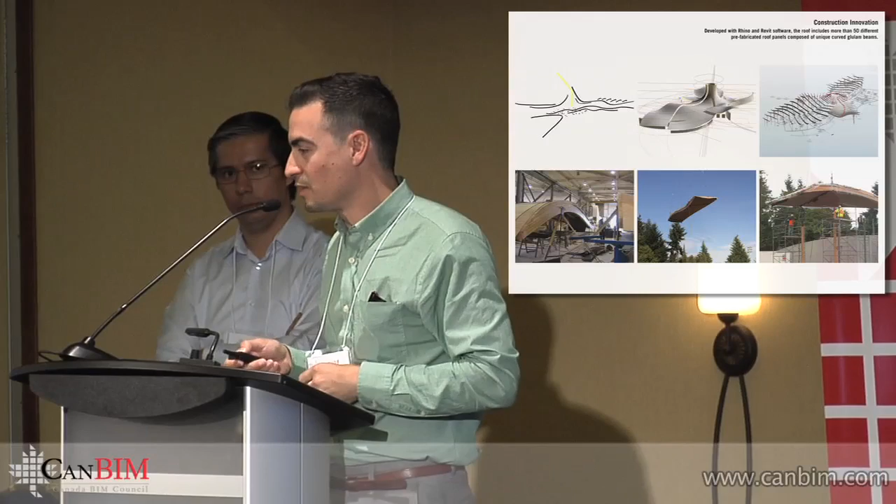Just some of the early studies from Rhino. And here you see kind of the designing the layout of the columns prior to the panels being put in place. And some imagery of the fabrication that was occurring in that StructureCraft shop in Delta. Sort of a sneak peek from the underside.

And one of the interesting things is we had almost this finished ceiling, like the roof was completely done, yet we hadn't even poured slabs yet. Kind of fascinating on site to see this erection come together in this sequence.

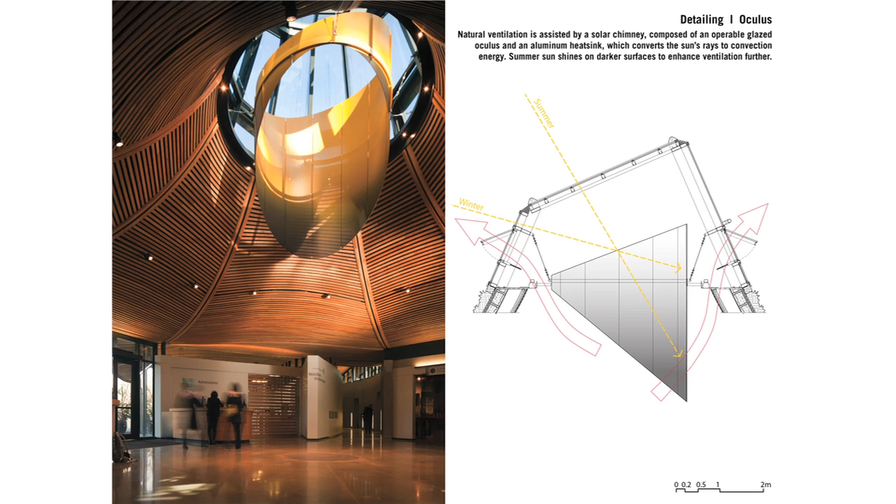And at the center is what we were calling the oculus, which is sort of a major feature within the building for stack effects. So we modeled this quite extensively in 3D. So the thought was that as the sun moves around the building, the heat would actually be turbocharged by this heat sink that you see, that yellow perforated surface, which would turbocharge the temperature differential between the lower areas of the building and the upper areas.

And there's actually a heat sensor on the top of the oculus. So when it reaches a certain temperature differential, the vents open up on the top of the oculus, and vents open up lower in the building and draw air naturally up through the building. So what we thought was we'd create a real design feature right at the center that speaks to this notion of sustainability.

All right, Santi, you have 3 minutes and 6 seconds. Okay, so I'll have to fast forward a little bit here.

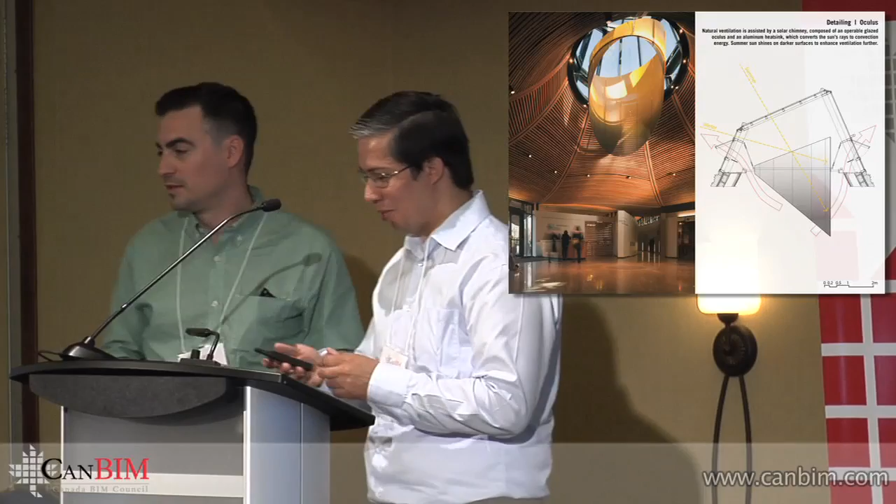There's some background knowledge, but basically a lot of this work was prompted by the idea that risk or uncertainty in the design process stifles creativity. And so the impetus for using computational tools in this project was driven by risk mitigation. And so just to go through this really quickly.

Okay. So there's part of the model, the structure, about 3,000 unique joists, 70 or so unique panels. At first glance, it looked a bit difficult to build. So let's look closer at the geometry and some of the drawings that were available at the moment. What could go wrong with the roof? There are 3 things that we thought might deserve more attention. One of them was that the drainage of the roof didn't look like it was going to work. There were a couple major ponding points that were too far away from the demising walls.

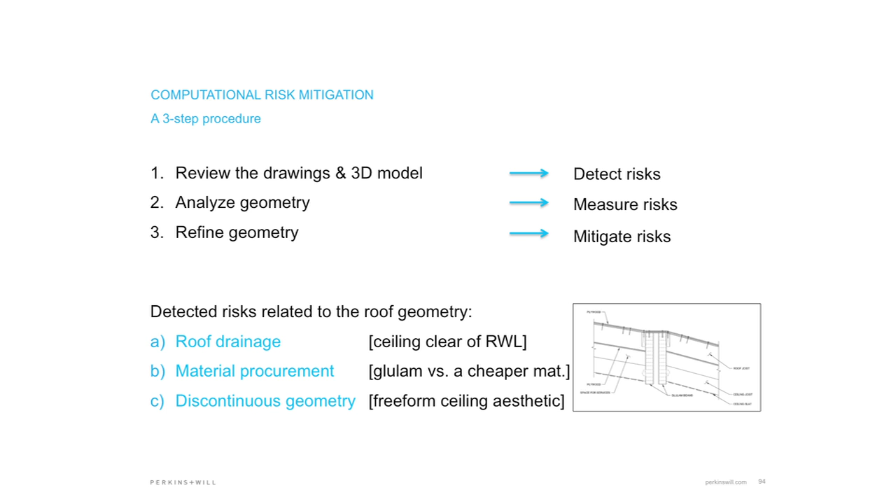The glue laminated beams that were the sides of the integrated panels were having unrealistic curvature in terms of the lamination process for the glulam. And the third is that there was this concern that the smoothness or continuity of the ceiling might be interrupted because of the geometry that it currently had.

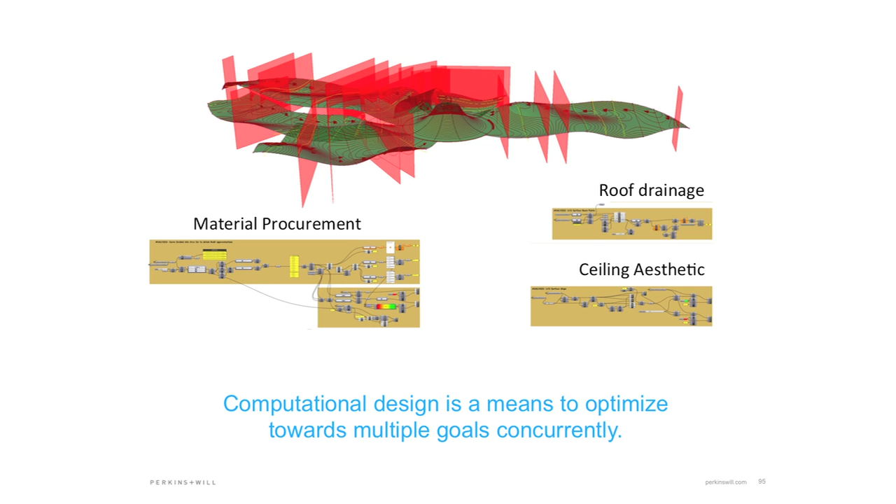And so, again, using some computational tools, we assessed these 3 risks. The key is that we did it simultaneously. So we could concurrently modify the shape of the roof, get instantaneous feedback about whether we're closer or farther away from these goals, and be able to negotiate these 3 values that we were trying to protect in the project within a bit less than a week.

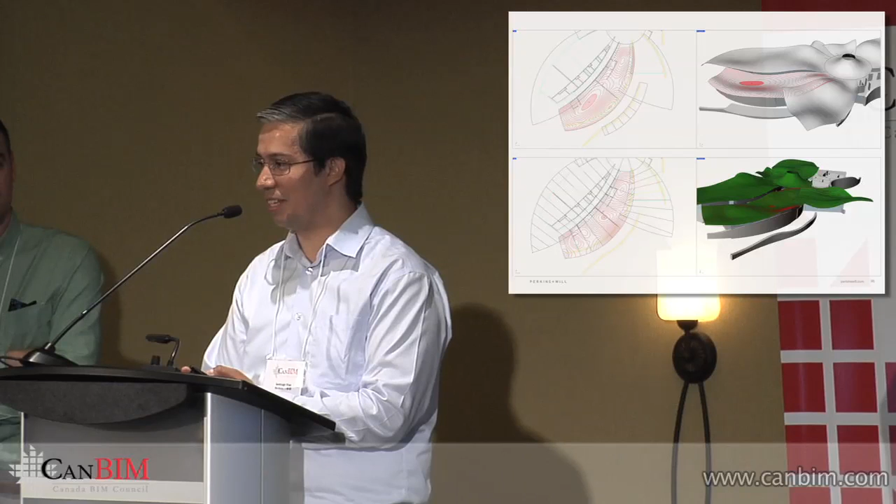And they were pouring slab on grade around some areas where drainage pipes were being run a few days after that. So it had to happen very fast, faster than the time I have left for this presentation. So here's a before and after of the ponding points example. There's an example graphically of the changing radii that was assessed in the roof.

After that exercise, with another 2 weeks of work, we were able to add lots more detail. Otherwise, it would have taken a few months to get to this level. And this was very important because in a large room with various consultants and stakeholders, we could discuss issues and details throughout the project without having to wait for the information or the geometry to be available. We got there so much faster, and there's not even enough time for the key points, so